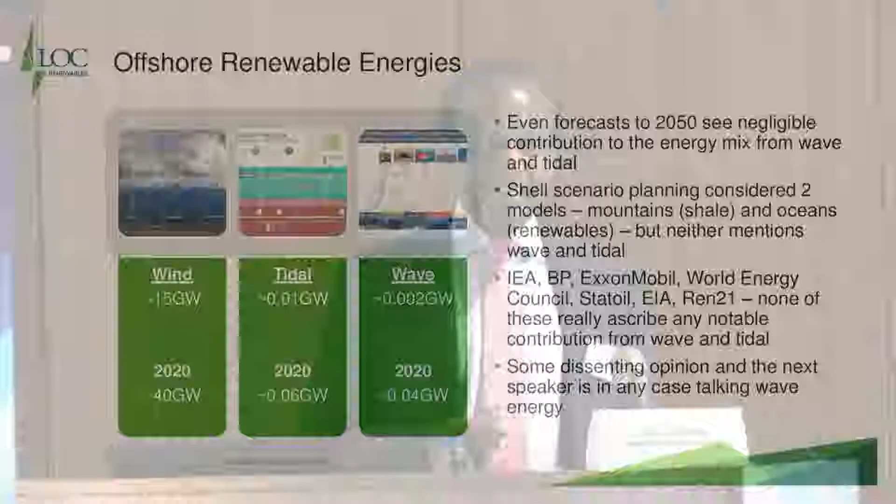So offshore renewable energies. When you talk about offshore renewable energies, there are three main aspects that we tend to think about. Not quite offshore, but now we have some floating solar farms in the UK. Probably the largest floating solar farm, but that's not quite offshore, but it's important. Leaving those extreme special topics, primarily we are talking about wind, tidal, and waves. And I just wanted to kind of highlight the magnitude differences in terms of current installations between the three sectors and the forecast installations to 2020.

So we think that we are likely to have around 40 gigawatts, maybe a little bit less. And so far we are about 15 gigawatts of capacity that's installed. But in tidal and wave, it's actually quite small. And I did do some research into looking at what was the energy transition outlook that the industry has today with regard to looking at 2050. And lots of people do this. There are about 6 or 7 oil companies do it. It's quite an interesting read because they all follow in one form or the other a kind of scenario planning concept that Shell got famous for.

And in none of those do you ever find that in 2050 there is a significant contribution from wave and tidal. I'm particularly provocative this morning, so just shoot me down later. But I think the key point here is that it is a technology that is still struggling to find its unique way forward. Shell actually did two different scenarios. So they have scenarios which talk about shale oil becoming pretty big, and the other one is renewables. And in neither case do you see wave. They do actually call out wind very heavily. All of these scenarios look at wind as a major renewable energy source for time to come. And of course, photovoltaics is going to be even bigger.

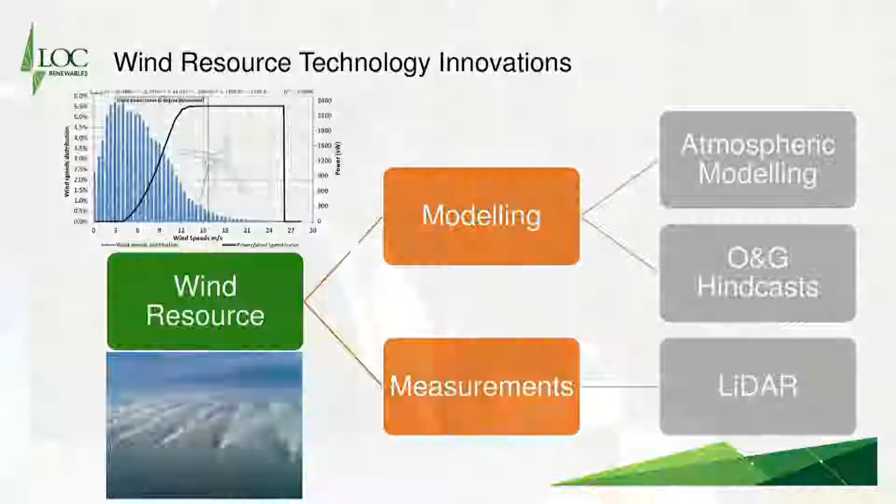So I think the research topics that we have, the technology trends and innovations that we need to make on wind resource, in modeling, atmospheric modeling, and I think it's already pretty sophisticated, but I don't see much cross-fertilization between oil and gas hindcasts that have been going on for the last quarter of a century at least in the oil and gas business. And that cross-fertilization might speed up and give us a faster way of getting knowledge that will produce bankable annual energy production information.

The second is in measurements. Of course, I think all of you are probably well versed in the topic that we are now going to move further and further away from potentially anemometer measurements to LiDAR measurements, provided all the contractual arrangements can be made to work in terms of turbine specifications.

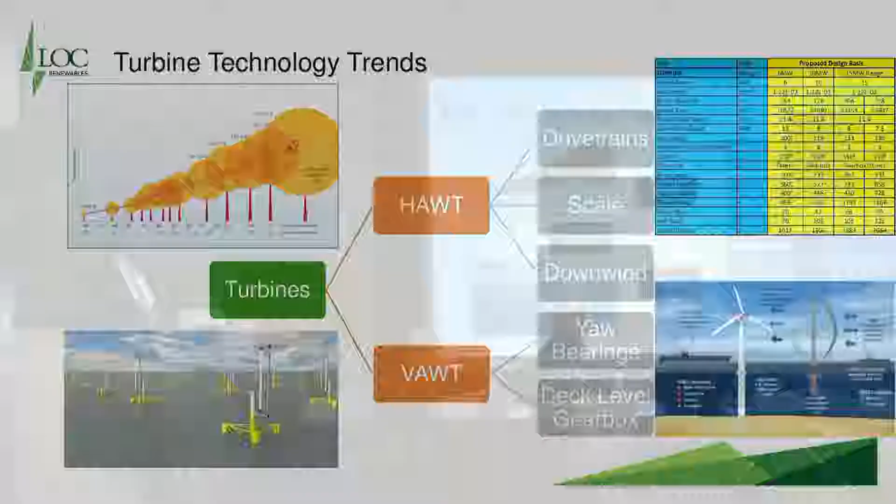In terms of turbine technology trends, there are possibly two angles, although I come across people who are religiously one or the other and will never countenance the alternate technology. But fundamentally, I think that the innovation questions deal with drivetrains. Are we going to go further and further towards direct drive, as Siemens is doing, or are we going to do gearboxes as we grow bigger, even as MHI Vestas is doing? So drivetrains would be an innovation topic that will keep the technology on its toes.

The second is scale. I saw that we are now very close to 10 megawatts. And as a hydrodynamicist, I get excited about floating structures. So I think if you go to floating structures, you need to then get some pretty large scale turbines in order to make that commercial.

And the third is downwind. As you go into heavier and typhoon areas and you want to make production, and you have material flexibilities to consider, is there a question that we should look at downwind turbines rather than the conventional upwind turbines?

And on vertical axis wind turbines, it's an arguable point. I think the fundamental point of part of the blade going against the wind during the rotation is always going to impact on the efficiency. However, there are some pretty positive things: you don't need yaw bearings, and you probably don't need to have working at height, which is an O&M issue, which is probably about 40% of an LCOE calculation, to help you to maybe make sense of vertical axis wind turbines.

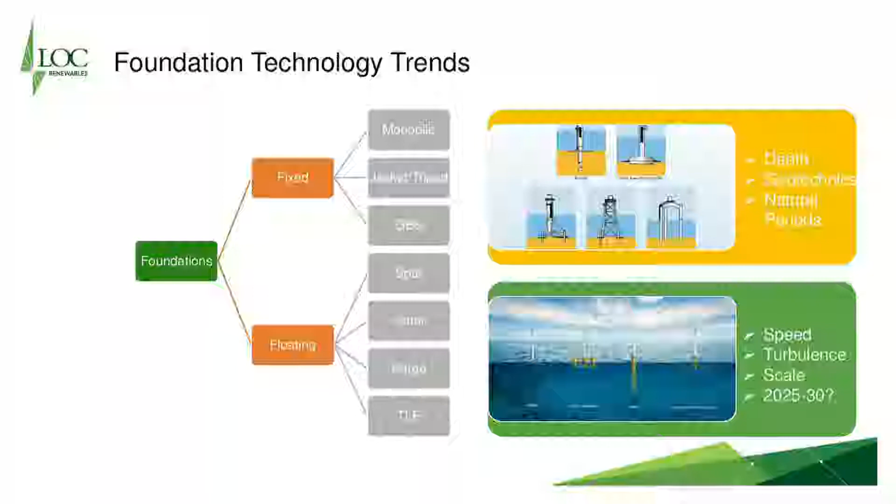Foundation technology trends, I'll broadly say I think the fixed part of it is pretty much resolved. And I think the challenges that we see relate very much to the floating structures. And in floating structures, the prize is still exciting because speed is high, turbulence is much less as you go further out. And of course, now that we can marry the scale from the turbines, we might actually see commercial projects on floating offshore wind, certainly by 2025.

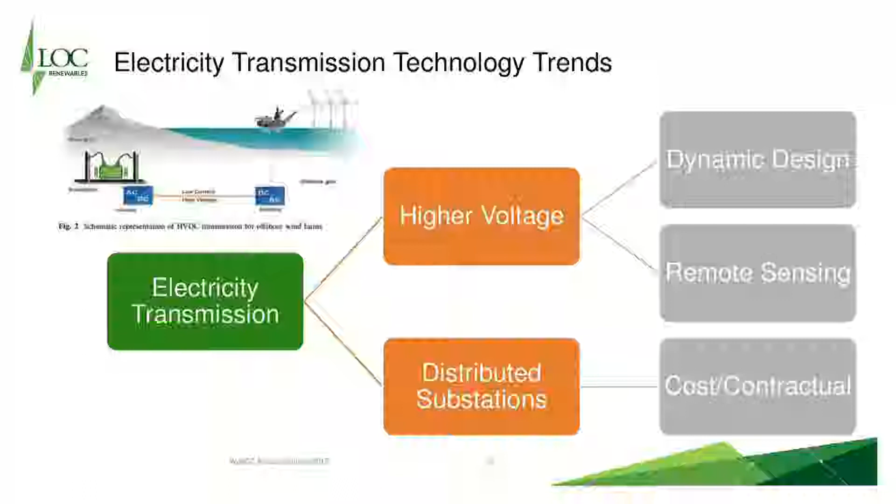I think I've gone too far already, but very quickly, I just wanted to highlight the electricity transmission. I think it's going to go further and further towards higher voltages. And that means then dynamic design. Along with floating structures and higher voltages, you need to have the ability to design dynamically. And then the next question is on distributed substations. I'm nearly there.

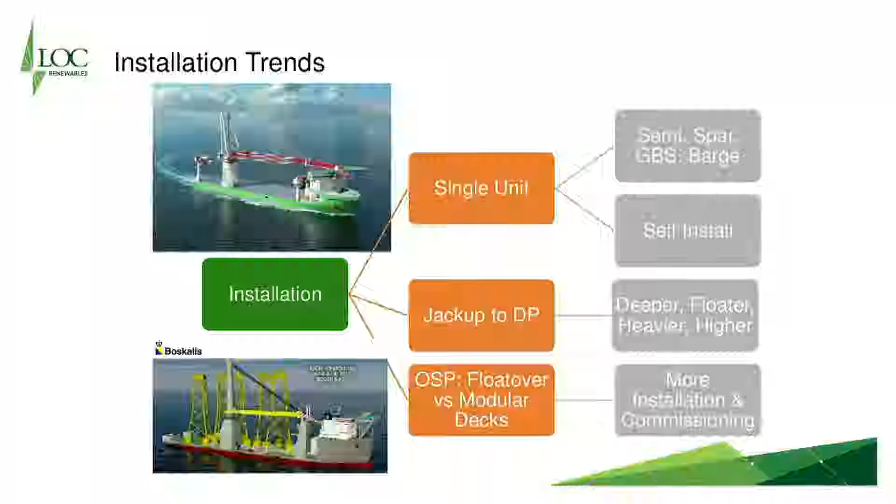And then on installation, the big move is going to be from jackups to DP. I remember about a year and a half ago talking about it in my office, about doing high and tall lifts with dynamically positioned vessels, and everybody pooh-poohed it. Now at least two manufacturers are involved in building dynamically positioned vessels that are capable of lifting 3,000 tons, maybe even 1,500 tons at 150 meters high. So I think we are going to move further and further towards floating access for wind farms.

And O&M, I think instead of access there, the remote management of offshore wind farms is going to be very big. And we already see this in really complicated situations in offshore oil and gas, where people are stimulating wells by simply sitting in an office, because you can actually get horizontal drill through to the well site to get all the information. So my belief is that the less people you can put offshore, the safer the whole project goes along. And of course, safety is also then cheaper for us to do.

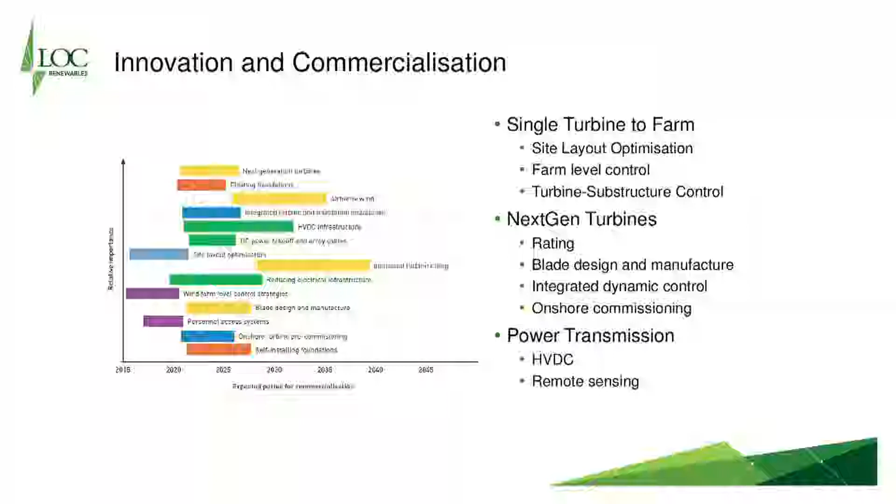I'll quickly show you the IRENA one, and I will jump through that, but I thought I'd just finish with my crystal ball, which is, I think we started in individual turbines, people really fine-tuning them, small. Everybody had their specialist little areas, and it was fixed, and it was

the trend would be farm level integration, greater than 10 megawatts, control that is integrated, that is to say the structure, the turbine and the foundations would be integrated in the control systems, floating structures, very remote access, as I've said to you in the O&M piece, and eventually dispatchable. As you know, Statoil has put in this Batwind project, which is to also try to smooth out the variability.

But I think it still has quite a big jump to go to. Thank you very much, and I'm sorry I've overrun.

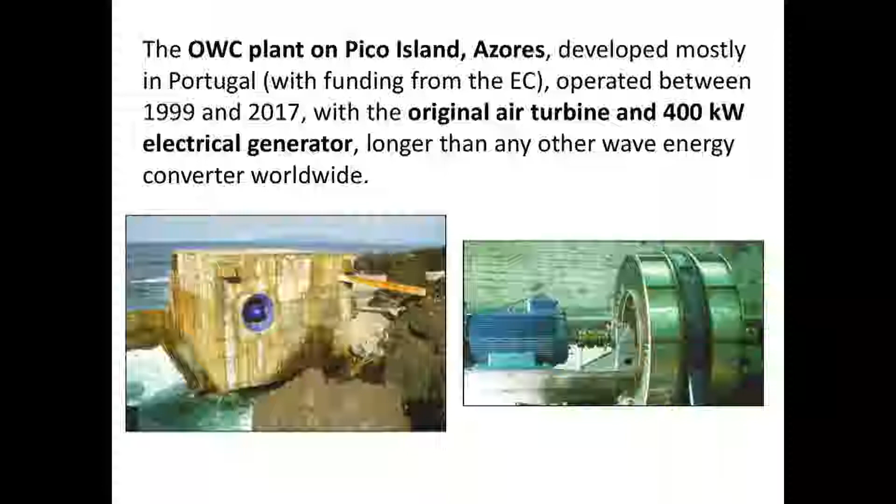That is 18 years. Not continuously, but it's still operating. And this is longer, I think, than any other energy converter worldwide. The plant will be discontinued in 2018, next year.

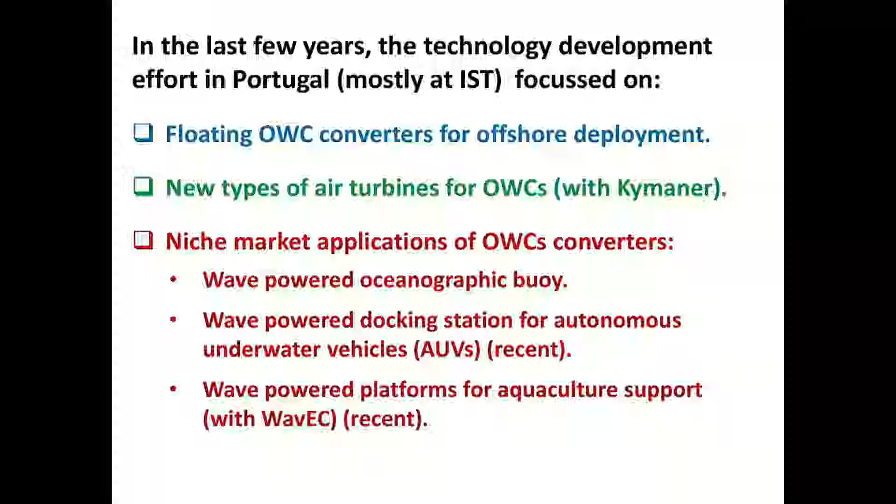Now, in the last few years, the technology development effort in Portugal, mostly at Instituto Superior Técnico, focused on the following points: floating oscillating water column converters for offshore deployment and large-scale energy production, new types of air turbines for this kind of plant, and this is being done with Portuguese company Kymaner, and there will be a short presentation by Kymaner later in the morning here.

And some niche market applications of wave energy converters, and I will name the wave-powered oceanographic buoy. This is being developed in conjunction with the University of the Azores. Wave-powered docking station for autonomous underwater vehicles, that is AUVs. This is a recent topic of research at IST. And wave-powered platform for aquaculture support with WavEC, and there will be more presentations later in the morning about aquaculture.

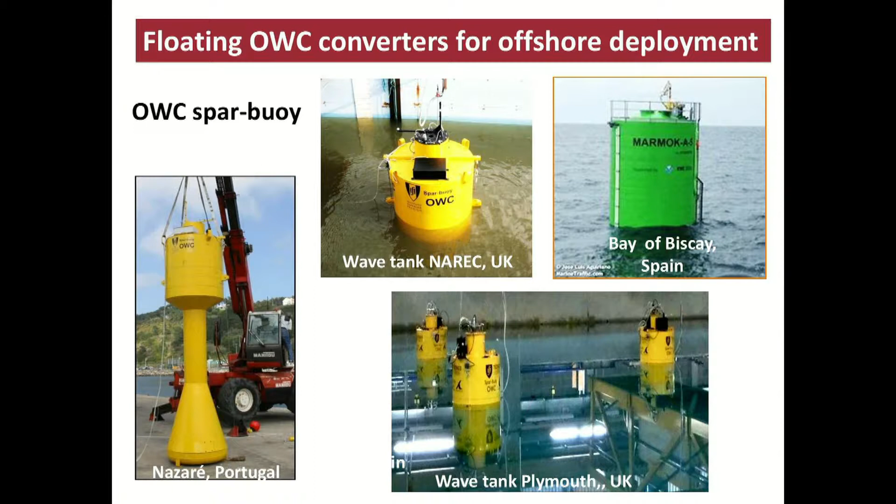Now, floating OWC converters for offshore deployment. I mention here the so-called OWC spar buoy, which is a type of oscillating water column. And you can see several pictures. On the left-hand side, you can see a prototype. The picture was taken in Nazaré, and models were tested in the UK, in NAREC, and in Plymouth.

And you can see on the right-hand side a larger model. I would say this is a small prototype that was built in Spain. It's being tested in the Bay of Biscay, not far away from Bilbao.

You can see here that these models are being tested, the other ones, in the UK. This means that it's not possible to test wave energy converters here except very small models. So we have to go abroad, either to Spain or the UK or France or elsewhere.

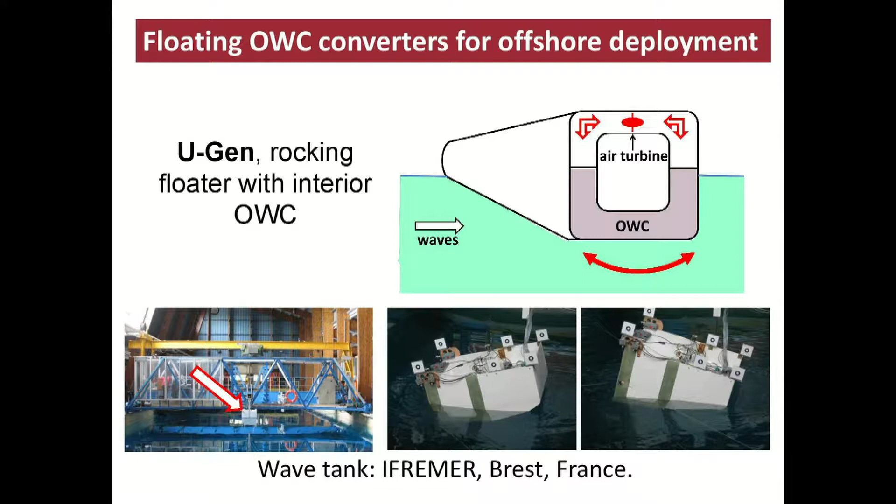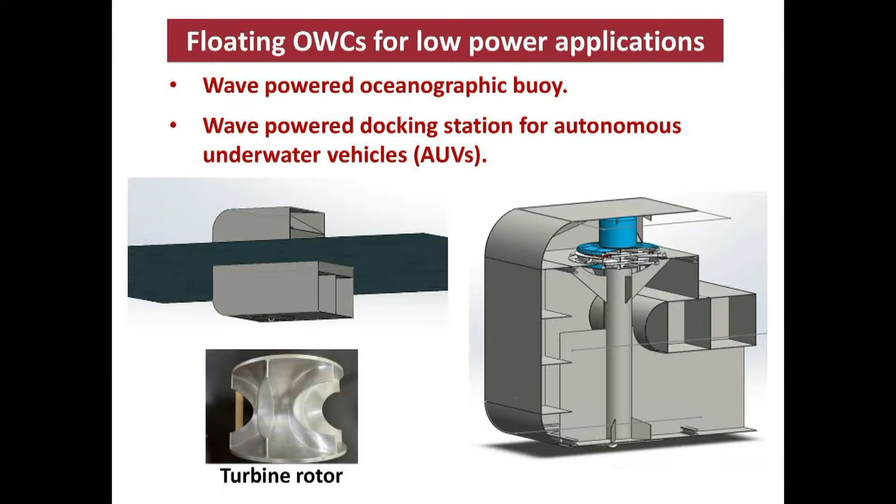Now, floating OWCs for low power applications. This is a different scale. That is for power levels of about 1 kilowatt or so, or a few kilowatts. And the wave-powered oceanographic buoy and wave-powered docking station for autonomous underwater vehicles. And you can see the power module. That is the drawing that is being developed at IST.

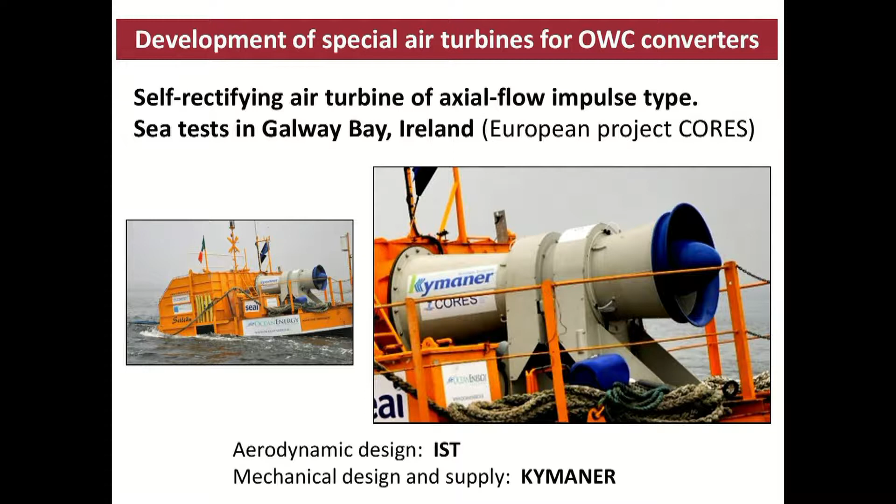Development of special air turbines for OWC applications. This is an important topic because there is a wide market for that. Portugal, and especially Kymaner, is almost the only supplier of special air turbines for this kind of application. And you can see here a turbine that was developed from the aerodynamic point of view at IST, as mechanical design and supply was

from Kymaner, and it's being tested in a floating platform in Galway Bay in Ireland. And this is a European project, CORES. You can see the name of Kymaner on the right-hand side.

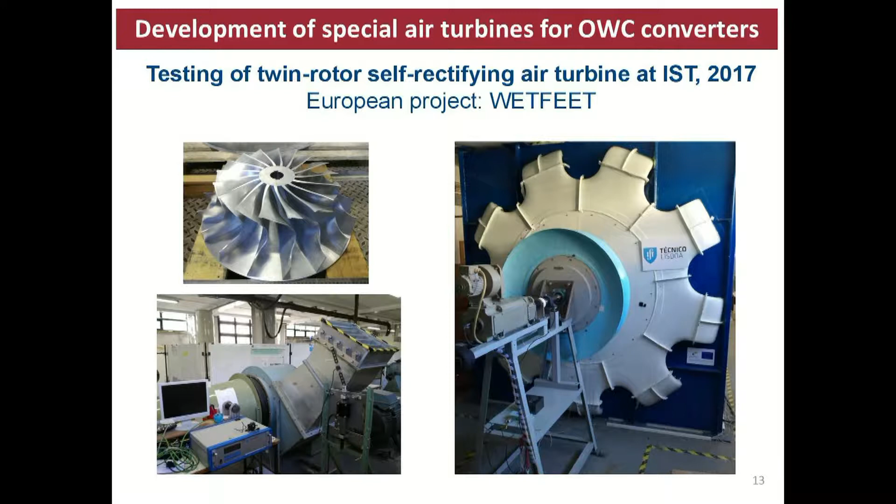Now, a very different type of air turbine was developed and patented in IST. You can see here tests being done. This picture was taken a few months ago, 2017. This is called the twin rotor self-rectifying air turbine. It's again a European project, WETFEET.

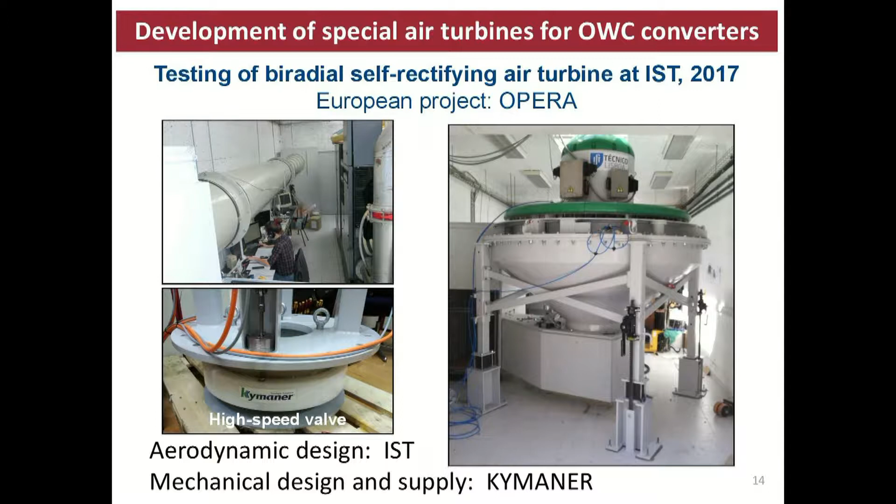And this is quite interesting. This is, again, a different type of self-rectifying air turbine for OWC applications. It was, again, patented in Portugal by IST. And you can see here a prototype that was mechanically designed and supplied by Kymaner. And you can see it being tested at IST in a large rig. This picture was taken, I think, June this year, a European project, OPERA.

Now, in Portugal, research and development in wave energy and in marine renewables in general is almost totally funded by European projects, although there is some funding from the Portuguese government. There is not much coordination between the research institutions and groups in Portugal, and I think this should be changed.

And in the case of wave energy, the interest in exploiting the results from Portuguese research and development is mostly from foreign companies, and I will mention Spain, Ireland, Denmark, and UK, not by Portuguese companies. And it is possibly as a result of some unsuccessful demonstration project, namely the case of Pelamis in

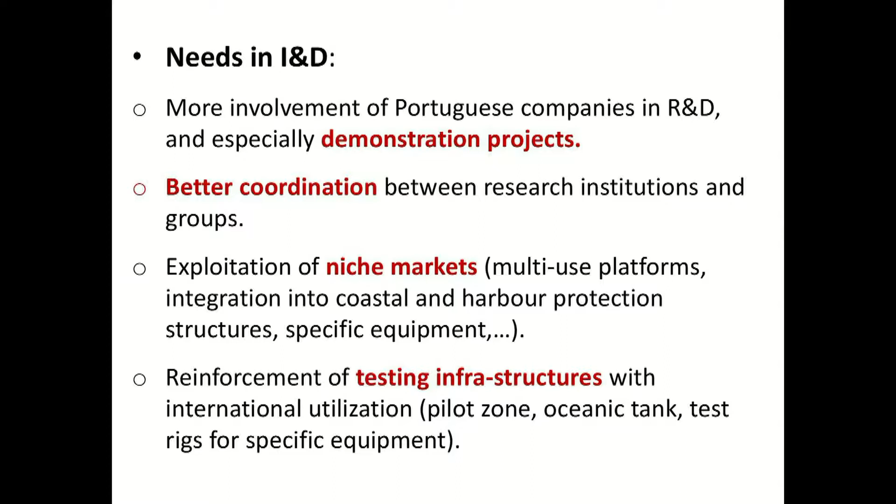2008. Now, needs in research and development: more involvement of Portuguese companies in research and development, and especially demonstration projects; better coordination between research institutions and groups. Sometimes for us to know what other people are doing, we have to attend an international conference. Exploitation of niche markets, multi-use platforms, integration into coastal and harbour protection structures, and specific equipment. And there is interest in oscillating water columns integrated in breakwaters, and we have collaboration with Italy.

Reinforcement of testing infrastructure. I'm going to finish in 10 seconds. Reinforcement of testing infrastructures with international utilization. This is the pilot zone, an oceanic tank, which does not exist in Portugal, and test rigs for specific equipment, and there are some in IST for special air turbines.